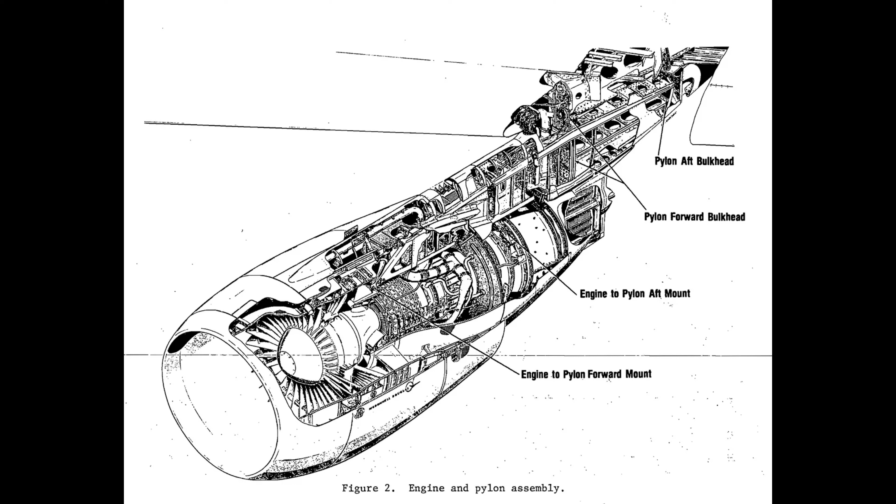It has almost no moving parts and exists only to hold the engine in its proper position forward of and below the wing. Engine pylons rarely require any sort of maintenance, a fact which posed an obstacle to airlines wishing to comply with McDonnell Douglas's service bulletin.

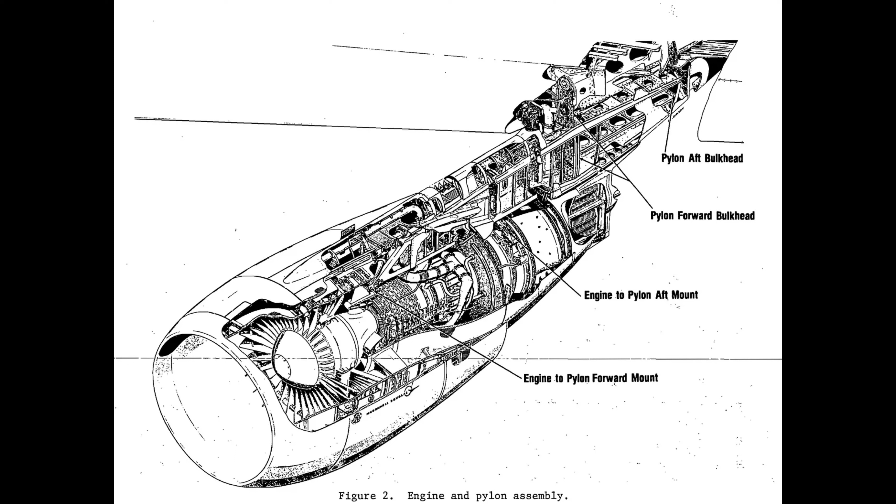Removing the engine and pylon was a complex and time-consuming task that was not part of any existing routine maintenance procedure, and the airlines were forced to find time for it while the planes were in the hangar for unrelated reasons. American Airlines, one of the largest operators of DC-10s, decided to carry out the work on the bearings when each plane went in for its C-check, a yearly session of thorough inspections and heavy maintenance during which the aircraft needed to be on the ground for an extended period.

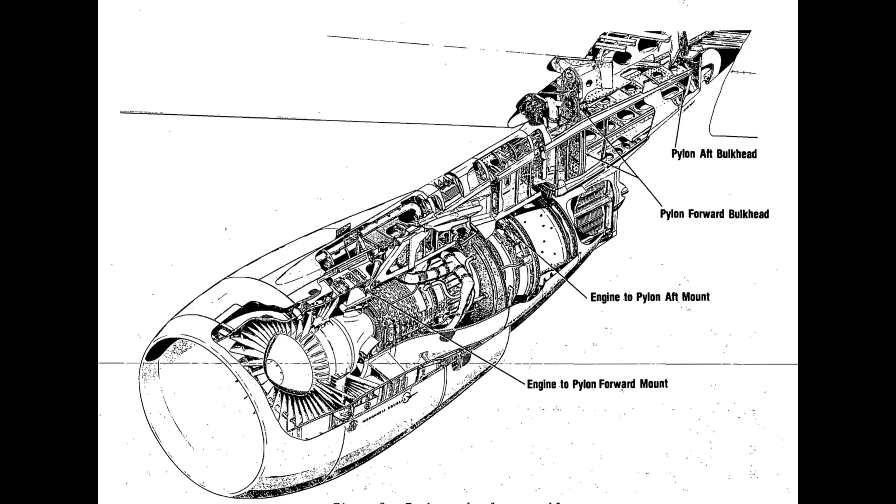But the airline already had good reason to believe that replacing the bearings would be exceptionally arduous. In 1978, American Airlines performed contract work on several DC-10s on behalf of a foreign carrier, which had asked them to bring the planes into compliance with the two McDonnell Douglas service bulletins concerning the pylon bearings.

The manufacturer's recommended procedure called for mechanics to first remove the engine from the pylon, then remove the pylon from the wing, a requirement which American Airlines felt was unrealistic, because it took hundreds of man-hours and involved the removal of no less than 79 different connections.

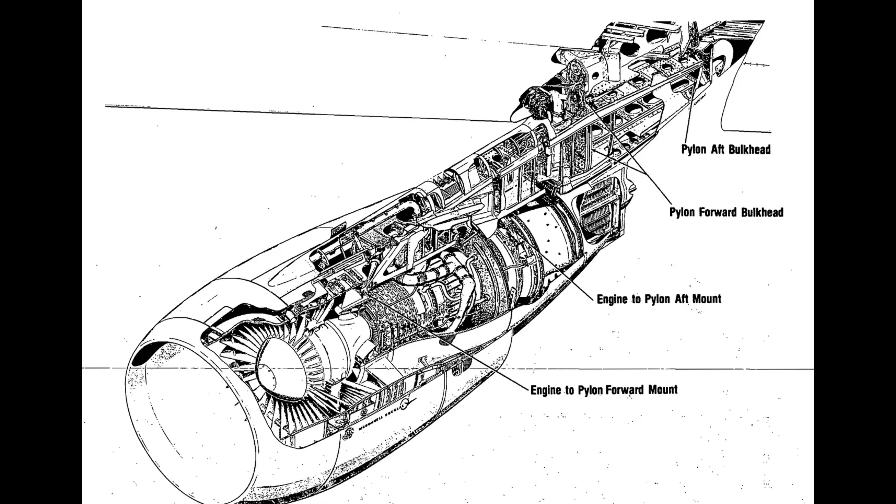On the other hand, if the engine and pylon could be removed together as a single unit, then the process involved only 27 connection points, saving nearly 200 man-hours of labor. Engineers at American were already aware that United Airlines had used this method to drastically reduce the time and effort involved in complying with the service bulletins.

But while United used an overhead hoist to raise and lower the engine and pylon, American Airlines opted for something even cheaper and easier, a forklift.

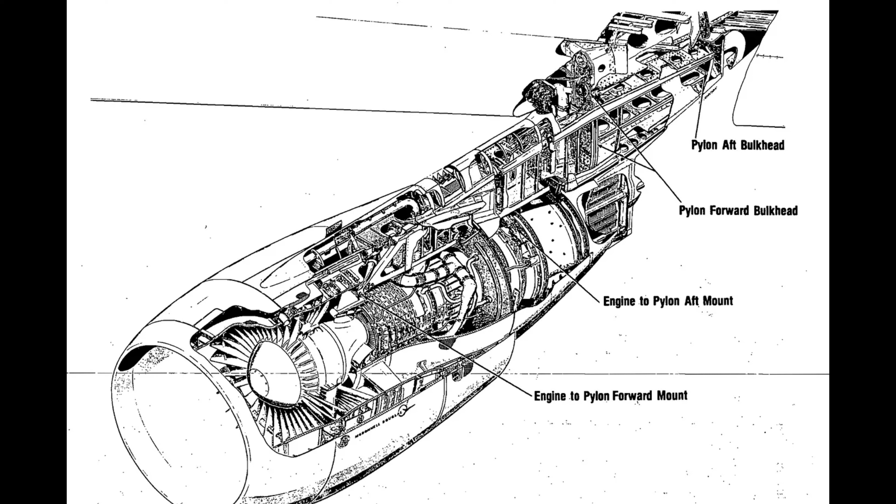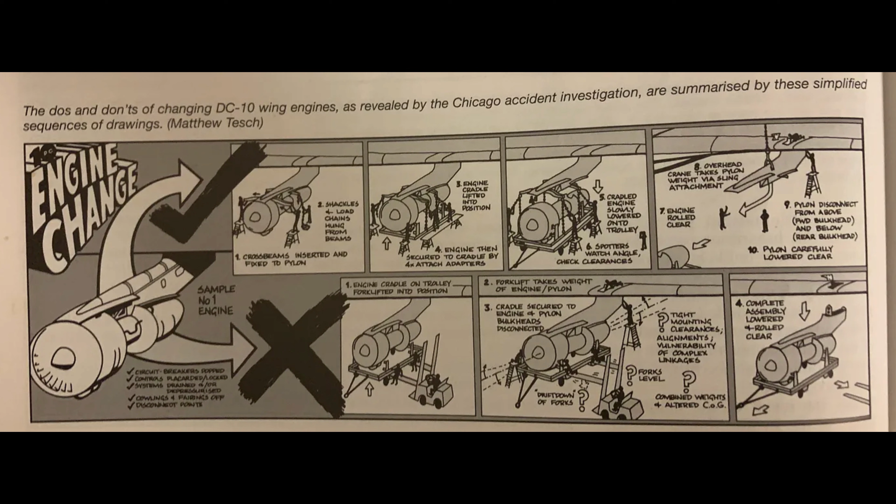The tricky part of raising and lowering the engine pylon assembly using a forklift was that the two parts together weighed more than 6,100 kilograms, and even the most skillful forklift operator could only adjust the height of the forks in increments of 6 millimeters or more.

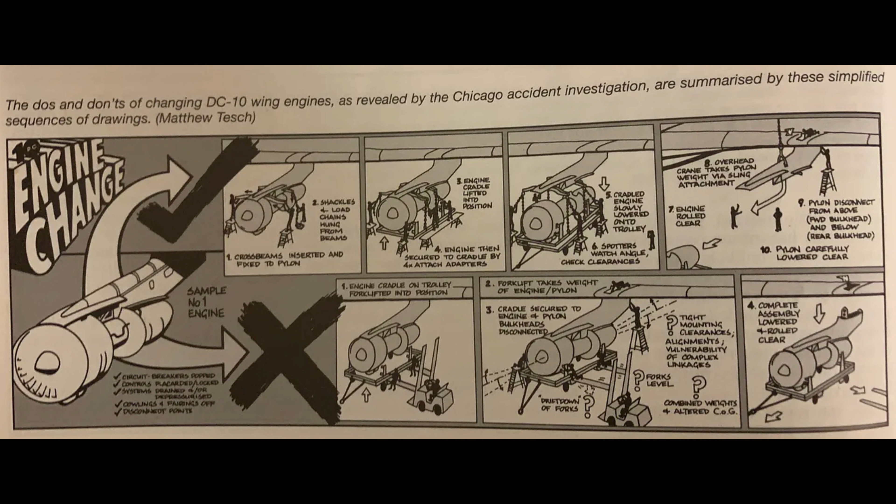To make matters even worse, the center of gravity of the engine pylon assembly lay nearly 3 meters forward of the pylon's forwardmost attachment points. All these factors meant that the process of detaching the pylon and engine, lowering them to the floor with the forklift, and then raising them back up to reattach them had to be performed with the utmost care.

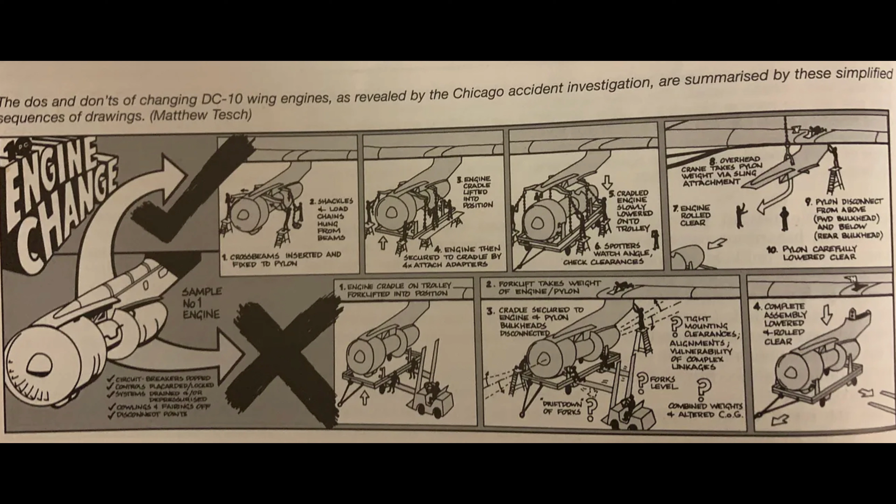One slight miscalculation of the center of gravity, one tiny shift of the forks, and 8,100 kilograms of metal could slam into the underside of the wing.

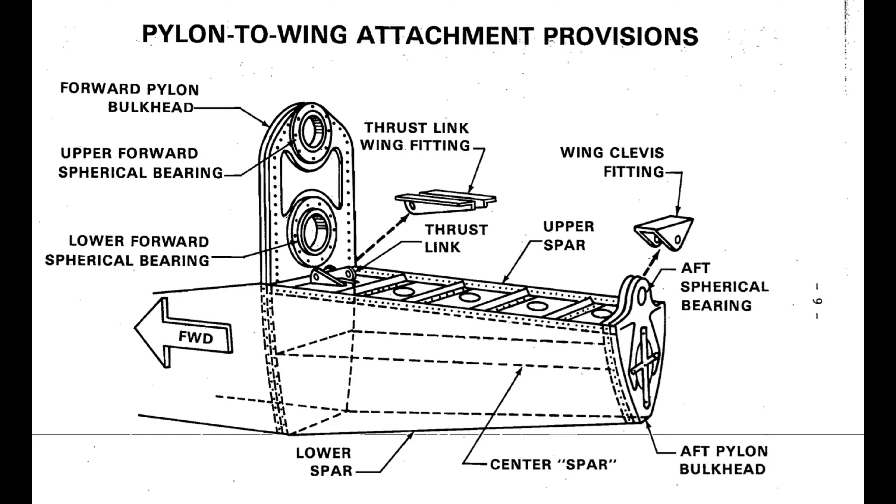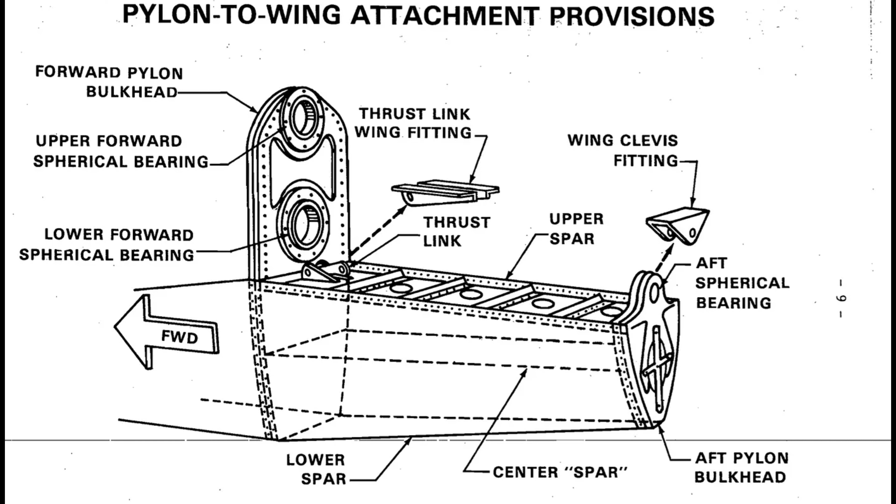The original procedure for detaching the pylon asked mechanics to remove the front attachments first. But with the engine still attached to the pylon, the stress on the forward attachment points was too great to remove the pins, and the problem could only be alleviated by disconnecting the rear attachment point first. While this made the pylon easier to remove, it also turned the forward attachment points into a rudimentary hinge.

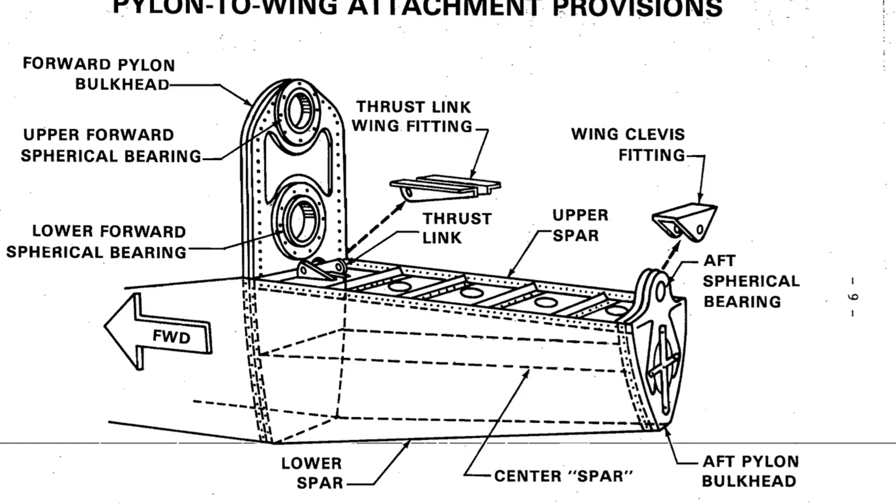If the forks were lowered too much following the removal of the aft attachment point, the heavy engine would cause the entire unit to rotate around the forward attachment points, sending the aft end of the pylon slamming upward into the underside of the wing with a force of more than 9,000 kilograms.

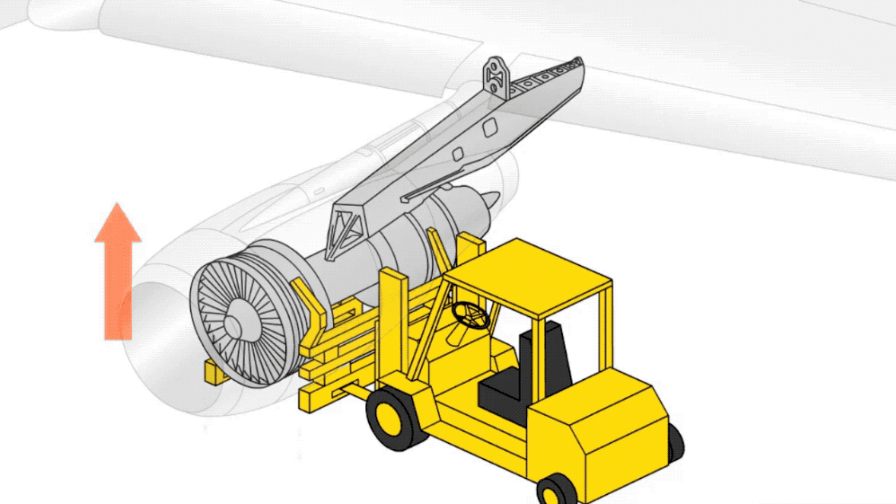Despite the risks involved in this procedure, and the difficulties that mechanics experienced while trying to carry it out, the airline was still using the same method when the DC-10 registered N110AA came in for its annual C-check in March 1979. At the American Airlines maintenance base in Tulsa, Oklahoma, engineers set about bringing the plane into compliance with the manufacturer's service bulletins, including those related to the pylon bearings.

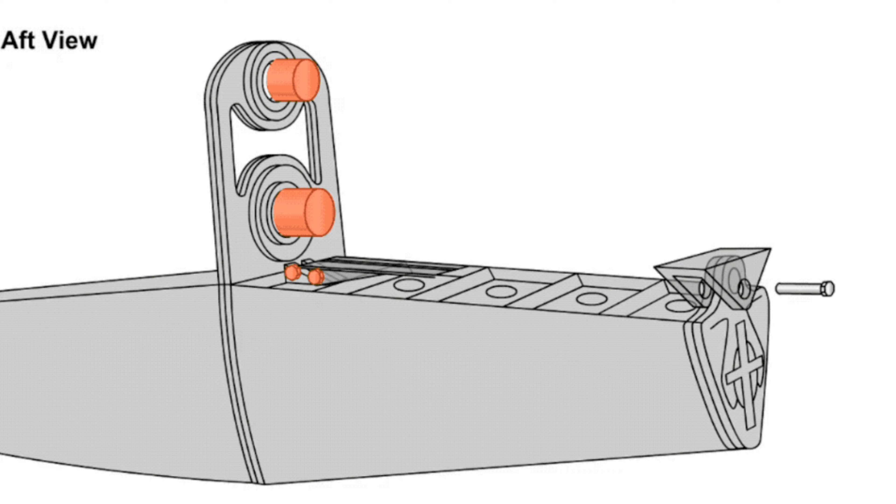As they had done several times before, they positioned the forklift beneath the engine's center of gravity, removed the attachments, lowered the assembly to the ground, carried out the repairs, gave it a cursory inspection, and finally prepared for the trickiest part of all, putting the pylon back into its mountings.

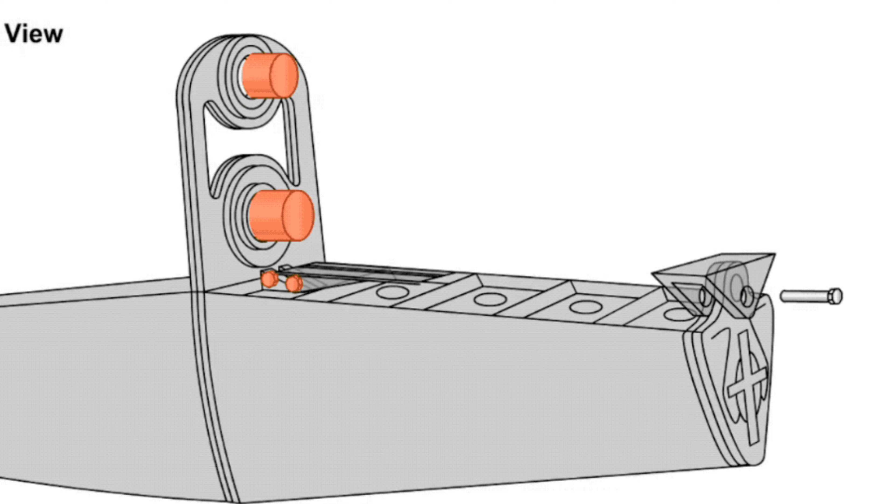At some point during the process of reinstalling N110AA's left engine pylon assembly, the pylon shifted and struck the bottom of the wing. When and how this happened is not known with certainty. But it might have occurred during a shift change, or when the forklift ran out of fuel and briefly sat idle.

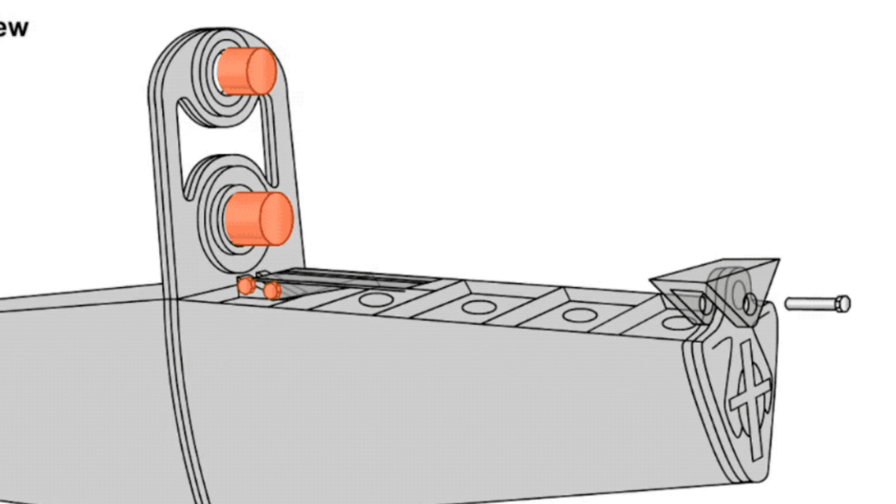This forklift was known to bleed hydraulic pressure, and the forks would drop by about 2.5 centimeters every 30 minutes when the engine was off, easily enough to shift the engine pylon unit around the forward attachment points and push the rear end of the pylon up into the wing.

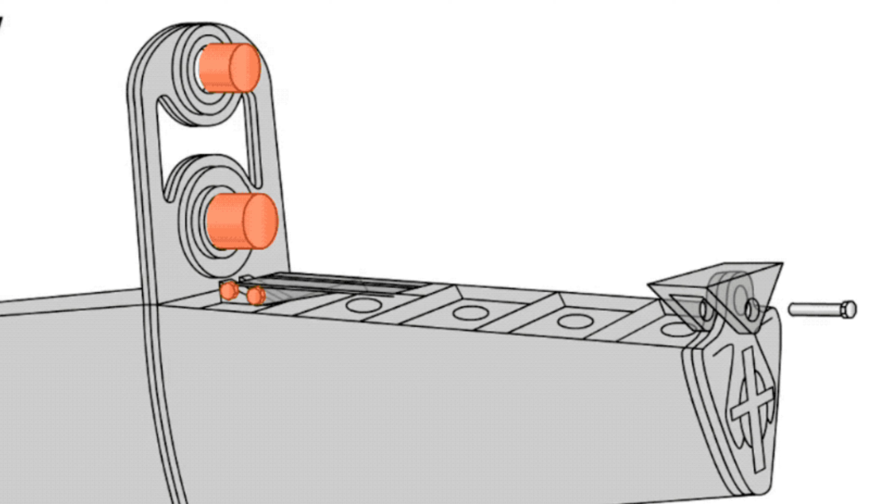When the pylon collides with the wing in this manner, the brunt of the collision is absorbed by the pylon's aft bulkhead. The bulkhead, a stiff metal plate spanning the interior cross-section of the pylon, normally attaches to a clevis on the bottom of the wing, but removing this connection was the first thing the mechanics did when they started disconnecting the pylon, and the last thing they would do when putting it back together.

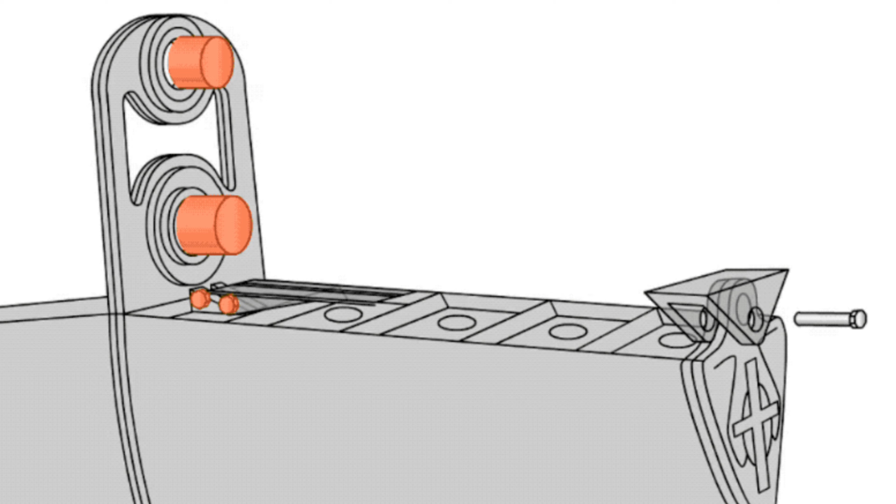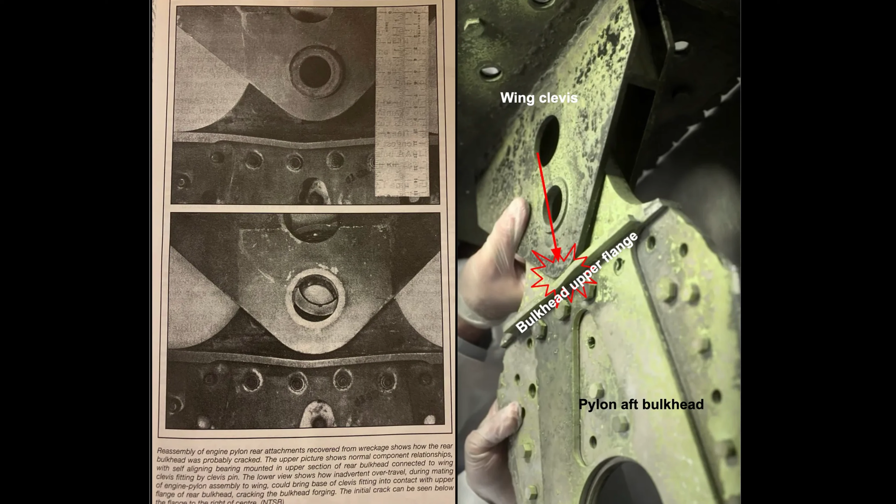Without the bolt joining the bulkhead to the clevis, the bulkhead could be forced farther upward until the clevis impacted the upper flange of the bulkhead, as seen in the above animation. On N110AA, this impact severely dented the upper flange and created a 25 cm crack right across the top of the bulkhead. Incredibly, no one noticed.

No one heard the sound of the impact over the general hubbub inside the hangar, and inspectors didn't spot the crack because it occurred after the inspection was completed. The mechanics screwed the pylon back in place and went home, completely unaware that the internal structure of the pylon had been fatally compromised.

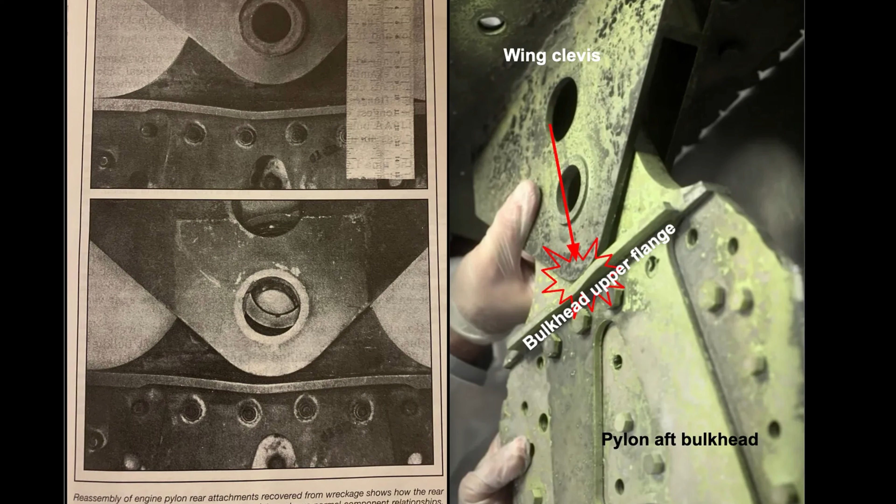With a 25 cm crack through the aft bulkhead, the remaining life of the pylon could be measured in weeks. Every time N110AA took off, thrust loads passed through the weakened bulkhead, resulting in rapid metal fatigue. The crack grew steadily over the next 2 months, creeping outward in both directions, until it reached a length of 33 centimeters. At this point the entire pylon was hanging by a thread, one more load cycle and it would fail.

That final load cycle turned out to be American Airlines Flight 191 on the 25th of May, 1979. 258 passengers and 13 crew boarded the plane, strapped themselves in, and prepared for the 3.5-hour flight to Los Angeles. Little did they know that Flight 191 would barely even make it past the end of the runway.

In command that day was 53-year-old Captain Walter Lux, a veteran pilot who was type-rated on at least 8 different airliners and had more than 22,500 flight hours under his belt. Assisting him were 49-year-old First Officer James Dillard and 56-year-old Flight Engineer Alfred Udovich, who together possessed an additional 24,000 flight hours. Their experience alone would have gotten them out of many sticky situations, but unfortunately, not this one.

At 15:02 that afternoon, the O'Hare Tower controller cleared Flight 191 for takeoff on runway 32 right.

"American 191, underway," Captain Lux replied. It would be the last time they spoke to air traffic control.

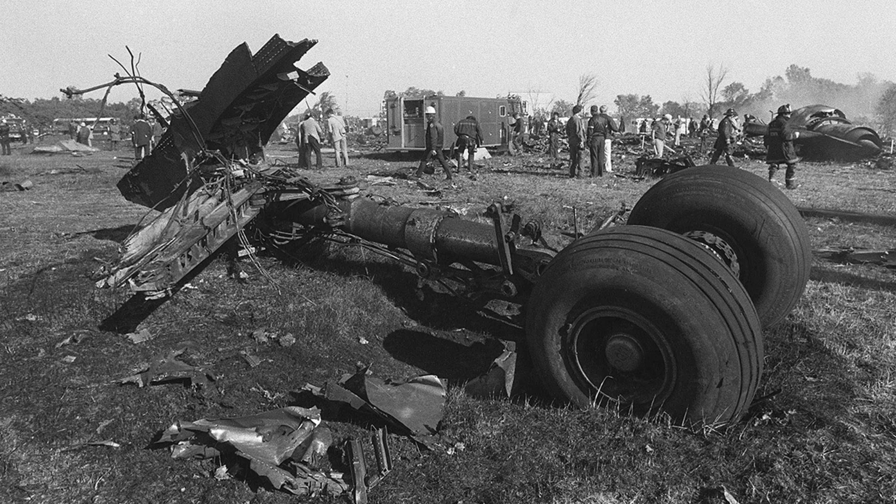Looking back more than 40 years after the crash of American Airlines Flight 191, it is indisputable that the tragedy led to profound changes that have made flying considerably safer. But for many who remember the crash, it marked a moment when their faith in the safety of airline travel was abruptly shattered. Many to this day recall the fact that the plane was equipped with live cameras showing the view from the cockpit, cameras which may have given the passengers front row seats to their own imminent demise.

For others, it was the last straw for the troubled DC-10, even though American Airlines was primarily responsible for the crash. Later in 1979, 2 more DC-10s crashed in Mexico and Antarctica respectively, causing further panic about the aircraft type, even though both accidents were caused by human error.

For several years following the 3 crashes in 1979, public distrust of the DC-10 was so high that sales flagged and McDonnell Douglas struggled to make back what it had spent on the plane's development. During this period, the DC-10 picked up its now infamous nickname, Death Cruiser, a moniker which it never managed to shed.

Despite its reputation, however, the Flight 191 disaster was the last time a DC-10 was involved in a crash which had anything to do with its design, and it went on to have an accident rate no worse than that of the beloved Boeing 747.

Today, the place where Flight 191 came down is still an empty field, the mobile home park is still home to hundreds of families, and the strip of land where the warehouses once stood is now a storage lot owned by XTRA Lease Trucking. A memorial now stands in a park several kilometers away, but the site of America's deadliest air disaster remains just as much an unremarkable slice of Midwestern exurbia as it was on that fateful day in 1979. However, as so often seems to happen, the site is soon to become a freeway interchange,